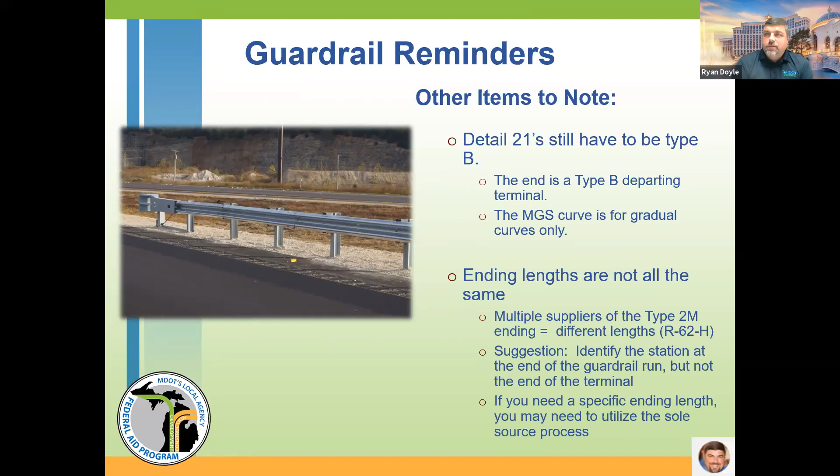But at the same time, when you're doing your design or your guardrail calculation, make sure that you use the shortest length, so that regardless of which one they pick, you're beyond your length of need. You can specify which one you want them to use, but then you do need the sole source paperwork for that. So just be aware that you need to use that sole source paperwork if you're going to do that. Okay, next one.

Remember that the MGS is required on NHS routes regardless of who owns it. And it's also required for safety projects. So if you have safety projects, that's what you're going to have to put in. A common issue is the height transitions, because MGS is 31 inches from the ground to the top of the rail, while the type B is only 28. So the height transition is actually included in the MGS guardrail pay item. If you look at the R-60-J sheet 10, you can see that.

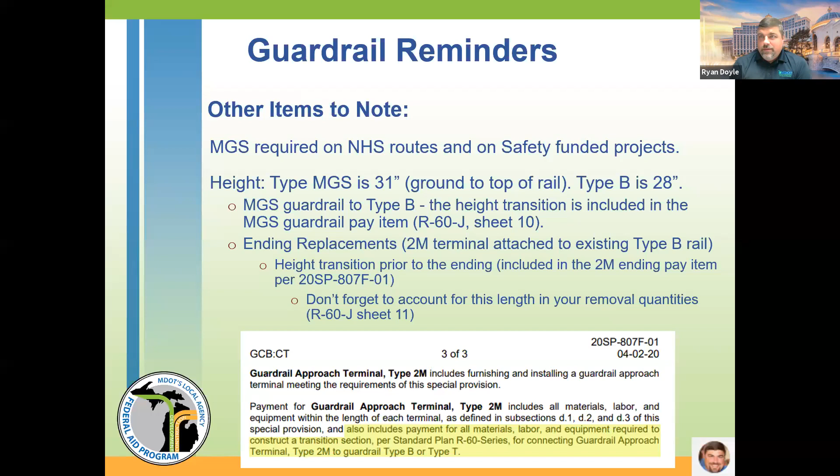For ending replacements where you're attaching 2M endings to type B rail, you need to transition prior to the ending, which is included in the 2M ending. However, don't forget to account for the transition length in your removal quantities. So just a few reminders there. All right, next slide.

Pavement marking, line width. In order to work with autonomous driving systems and the big push for that, MDOT has moved to 6-inch permanent and temporary lane lines. What does that mean for local agencies? Well, 4-inch lines will continue to be allowed. The 4-inch pay items are still there, so you can still do that, but it is your choice. You can convert if you want to. At this time, you don't have to. If there's a federal mandate to go to 6-inch lines, then you'll have to at some point. But for now, you can stick with 4-inch lines. Next one, please.

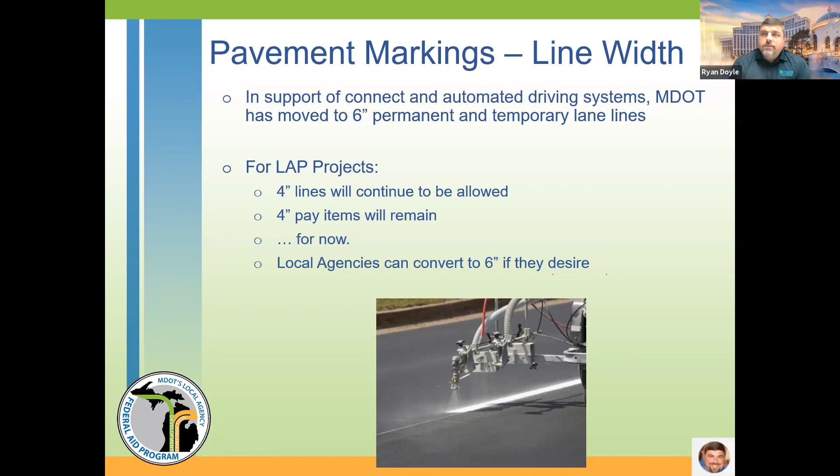Real quick, hopefully, I want to talk about sidewalk pay item changes. This is a big deal because you need to upgrade any ramps that are within a project that you're working on. And I'm sure everybody is pretty well aware now that the ramps have to be upgraded and made compliant with ADA.

But this is done incorrectly on the plans — I want to say typically, but a lot of times. And when you do, this is something the contractors look for. They take advantage of it. They know that if you didn't put enough quantity down for the right pay items to do the job, they're going to put a higher price on that and a lower price on the regular sidewalk, which they know they're going to be taking out or reducing the quantity of, because you're going to need a lot more of the right pay item. So I'll just walk through a couple of things here to make sure that you're aware of this, and hopefully you can avoid it.

Next slide, please. So first of all, the sidewalk ramp is now called curb ramp. So there really isn't a whole lot more to say about that. The pay item numbers and the name are different, but just be aware that between the 2012 spec book and 2020, that name has changed from sidewalk ramp to curb ramp. Next slide, please.

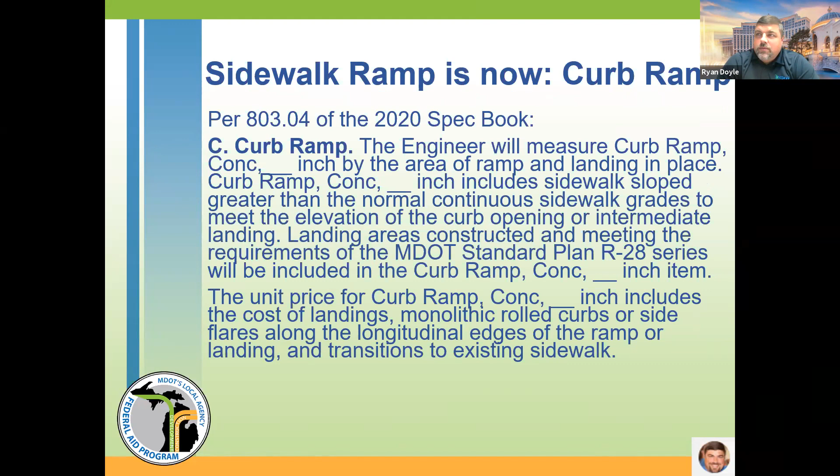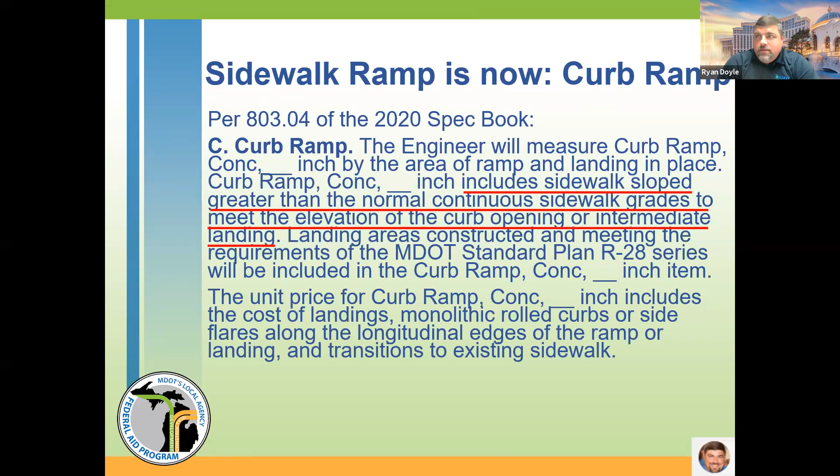Well, the good thing is in the new spec book, it's pretty clear regarding the landings, the rolled curb, the side flares, it's all included. It also lays out the limits in the pay item, which is actually the same as 2012, but there's always questions about the sloped walkway between the landing and the existing sidewalk. Go ahead and advance one. It should put some underline there. So if you read the highlighted portion of the spec, you'll see it's included until it reaches the normal continuous sidewalk grade. So that's important. So next slide.

All right, so if you're a visual learner like me, there's some visual slides here for you. You'll see along the curb and gutter the curb ramp opening. That's your curb ramp opening pay item. You'll see your detectable warning surface kind of floating up in the air. Outside of that, everything up to your existing sidewalk is paid as curb ramp. So if you really want to get into the fine details of it, you can.

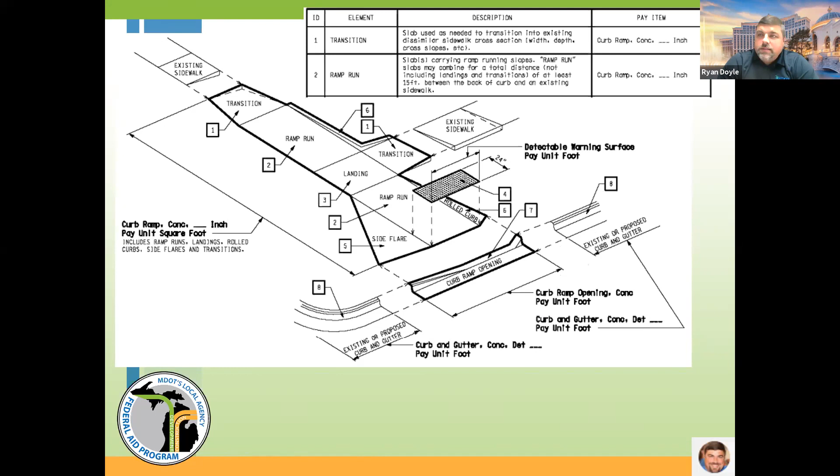Next slide. There's a blow up there of the transition and the ramp run definitions, which tend to have the most questions, but you can see them shown in the picture there. Number 2 is ramp run there. And number 1 is your transition back to your existing sidewalk. It gives you the definitions. Next slide. And then there's a detail of all the definitions.

So you can really get into this as much as you want, but the important part to know is that the pay item really includes everything outside of your detectable warning and your curb ramp opening until you get to your regular continuous sidewalk grade. So that's typically going to be more than you would think. And that's why contractors are going to bid that item high, because they know they're going to add quantity to that at a higher price. And then they're going to put a lower price on sidewalk because they know that quantity is going to go down because you're adding so much to the other one. And we just want to make sure you're doing it right too. So, okay, next slide.

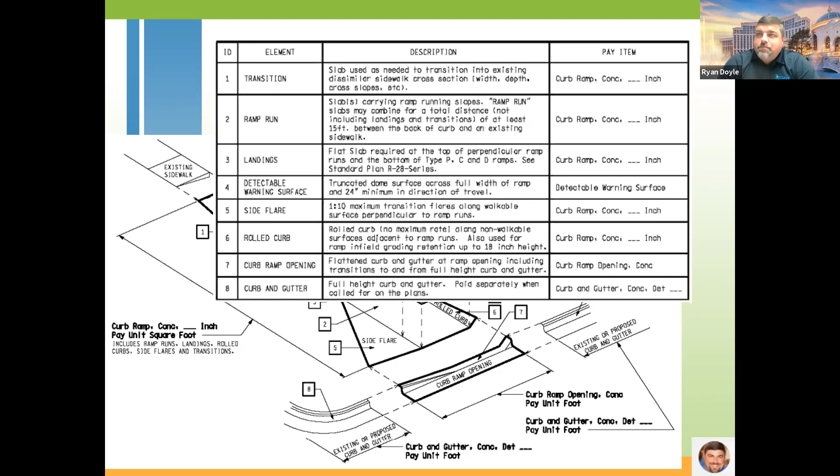Okay, a few other quick updates. Fiscal year 23 call for safety projects just had the last scoring meeting. So now everything needs to be compiled, figure out how far the funding will go, get our award list together, get it approved, and we can release it. So we're aiming probably right before or right after Labor Day to send out the award notifications for the safety program. I just wanted to give a quick update on some long lead times. So think about this when you're writing your progress schedule or progress clause on your contract.

Guardrail steel is taking up to 8 weeks to get in. Signposts are getting longer and longer now. Bridge beams and girders have always been a struggle; those are out about 25 weeks now. Mast arms and strain poles also, same thing. And then anything ITS, cabinets, detection equipment, all that stuff is a big question mark. It usually takes a while to get in, but it can take a short while or a really long while.

So just be aware of those things when you're laying out your project schedule, to pick some dates to have things done by and the problems that you might run into. Some of these things are not necessarily project specific. When contractors get guardrail and signposts in, the bigger contractors anyway, they'll get those in big quantities. So they may have them for your project, or they may not. They may have to order them. You might have to wait a couple of months. So just keep that in mind.

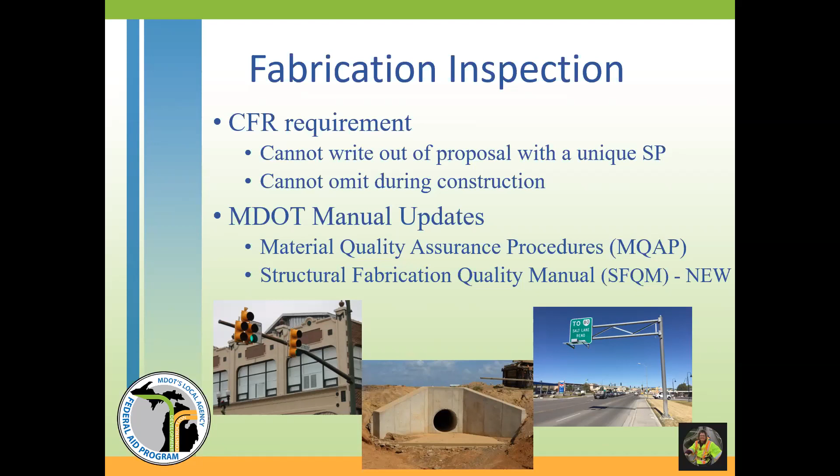At this point, FHWA has not declared any national material shortage, so we're not able to extend the times on the contract. However, there is a provision that if contractors are claiming that the delays are due to COVID, there may be an opportunity to extend time on a contract, but it would be non-compensable.

So if you have any contractors that are inquiring about this or have issues, make sure that you're talking to your MDOT responsible charge or your designated rep that's at the TSC that's helping you with the delivery or the construction of your project. They should be able to talk you through things and help you interpret the specs so that you can apply things properly.

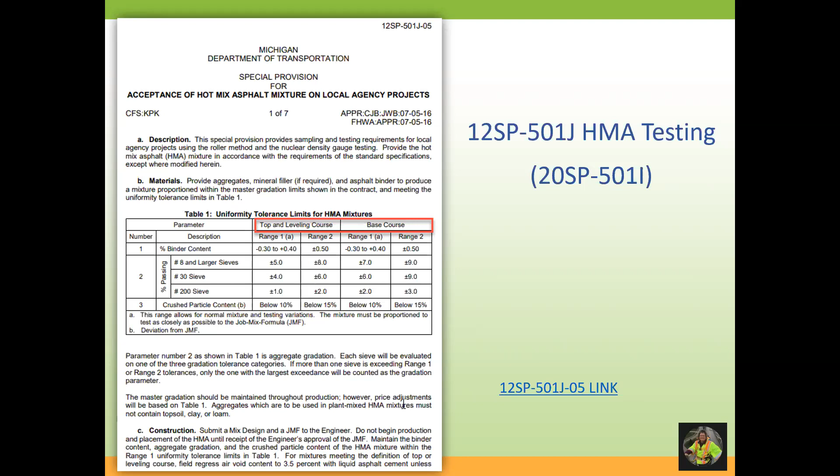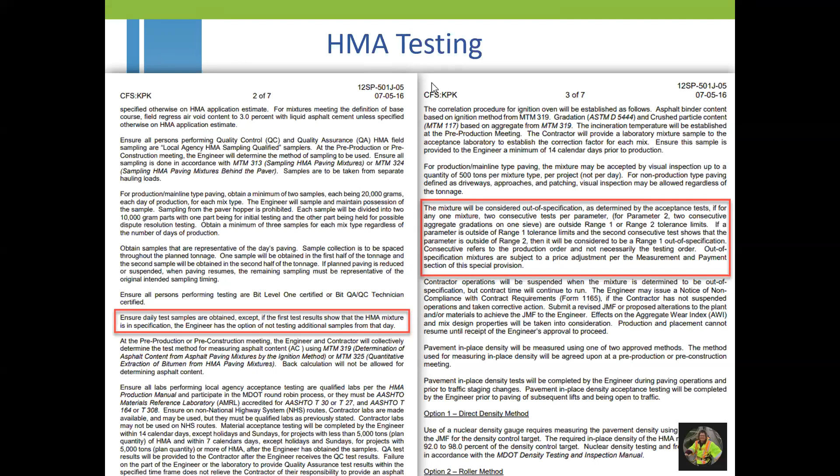The next couple pages of this 501J, you can go ahead and flip, show you tolerance things, and then the next page has some time frames listed. And you need to hold the contractor accountable during those processes. If things are found at the end of the project during the final project review, it causes problems because you can't hold the contractor accountable. Therefore, you can't do the proper pay adjustments with the contractor. And those pay adjustments then get passed on to the local agency. So you want to pay good attention to this area. We can go ahead and flip through the next slide too, and then the next slide as well.

Kelly, we've had a question come in if you don't mind. Okay. Based on what you've just shared, does that mean that no extension of timeline will be granted if there is a long lead time on materials? It sounds like our contractors are requesting non-compensable EOTs due to materials arriving post-open to traffic dates. Is that allowable?

So again, talk specifically with your designated rep that's assigned to your project at the TSC. But we provide what we're hearing is lead times, and we want those incorporated into schedules as you're getting the project bid. We know sometimes there are issues, but we don't want the contractor to always use that as a crutch and an excuse. So it's going to be situational, and that's why you specifically need to talk with your TSC designated rep. But we don't want the contractor to go in and take advantage of that situation. So it's going to be situational, and you need to talk right with your TSC. So hopefully that answers that question for you.

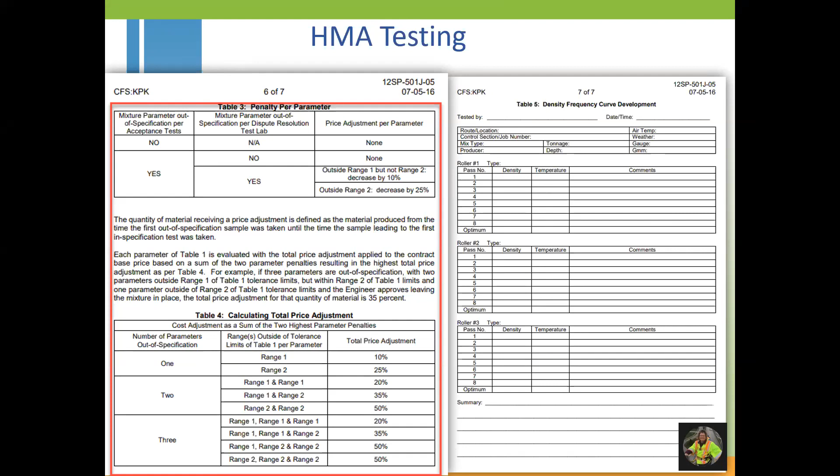So if it's got a pound sign, it means it has been reviewed. If it has the asterisk, it means it still needs to be reviewed. And all the payrolls should be getting reviewed prior to paying for materials and making the pay estimates.